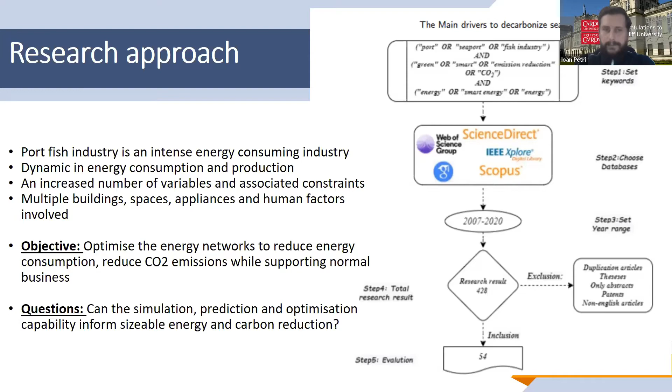Really our approach was a holistic approach, looking at the building level, the site level, and the appliance level. On the right side you can see a diagram that reflects the methodology we've adopted for developing this science-supported methodology, really from the thermal model definitions, a co-simulation environment, and what-if scenarios, and different control algorithms that we've implemented.

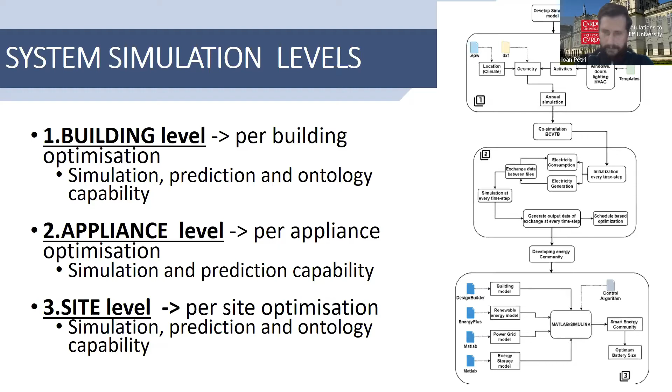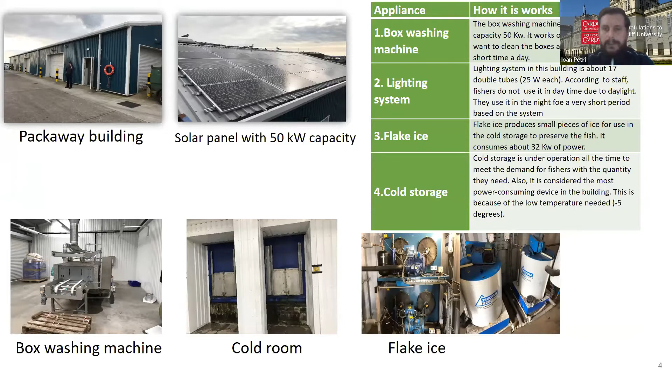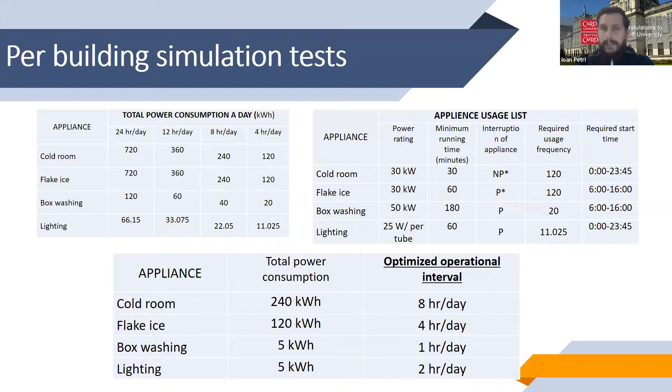From a perspective of a site and a building, we have different appliances, and we managed to collect different requirements as part of our requirements elicitation process, where questionnaires and interviews were utilized as a method to extract knowledge and information about the pilot project. We implemented preliminary tests to look at different operating schedules and their associated impact on energy consumption, while taking into account constraints such as power rating, minimum running time, interruption of appliance, and required usage frequency for different appliances.

On a cluster level, on a site level, we've looked to find ways of achieving impact, with the observation that impacts have different granularity when discussing an appliance, for instance, or a building and site level, where decisions can have different value in terms of costs and energy consumption.

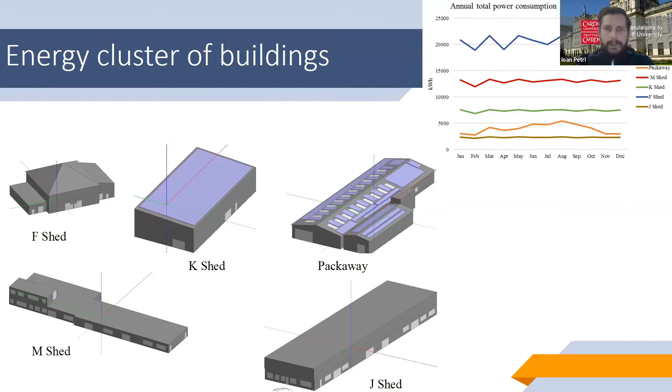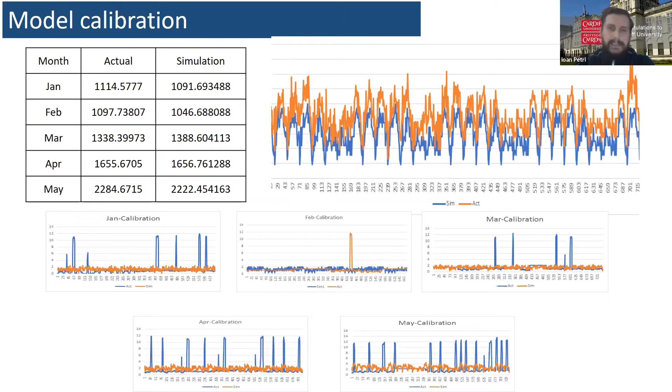This was extremely useful, because after we have a digital replica, we can test different scenarios which in practice we couldn't test due to restrictions that exist in the sites.

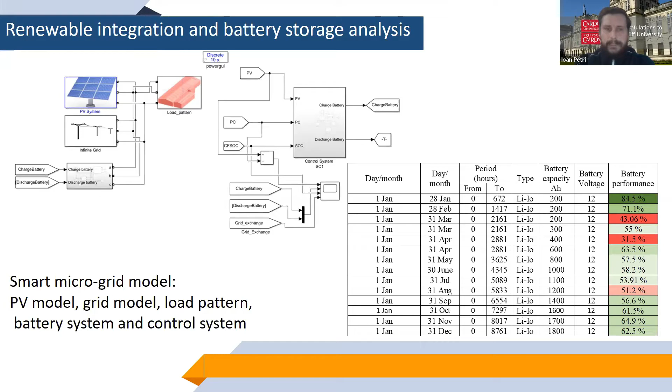Here we report a renewable integration and battery capability that we've developed through the simulation capability, where different types of battery performances have been tested with different input parameters such as capacity, voltage, type, and hours, with a view to develop this smart microgrid model that takes into consideration production units but also consumption units that may exist at the level of a fishery site.

Nevertheless, to integrate all these elements which have a certain complexity in the modeling, we utilized ontologies as a means to represent knowledge for different appliances and buildings, and to determine possible impacts and correlations between different variables and components that may exist in a site.

Really with the objective to have a quite robust and flexible simulation capability that can inform the development of a prediction and also optimization in sites.

For instance, our simulation capability framework can take as inputs weather factors, production factors, consumption factors, price factors, demand and time factors, with a view to maximize or minimize certain objectives such as production, consumption, and CO2 emissions, while instrumenting different values for the schedules and the set points at the level of appliance.

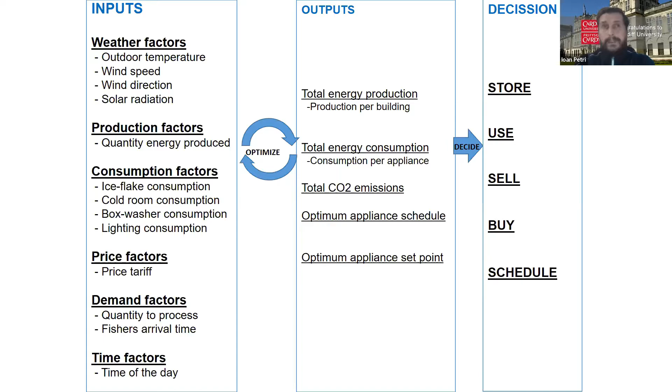Such simulation capability would give decision makers the ability to take informed decisions when to store, use, sell, buy, or schedule energy based on different events or constraints that may appear.

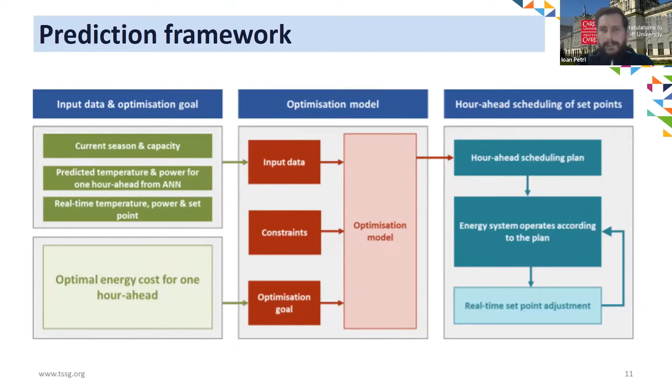A simulation-informed prediction framework has also been developed, where different input data such as season, capacity, predicted temperature, and power have been utilized with a view to enable forecasting of future scenarios. The input layer was primarily modeled around variables such as power, temperature, set point, capacity, and season, and the output layer, the result that provides future projections, is around temperature and power.

The objective was to have a workflow supported by science and evidence aggregated from the literature, but also from the very detailed requirements elicitation phase that we conducted in the trial sites, to understand what can happen in future in terms of energy consumption and demand, and more importantly, to enable decision-making and actionable insights at the port level.

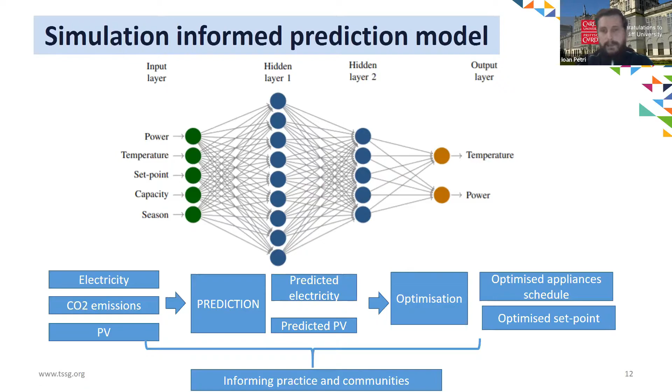In this context of informing practice, informing our industrial partners, and also providing a higher order of information for communities and stakeholders, we explain how different prediction models have been tested.

They provide different efficiencies, and we've chosen the best prediction, which is an artificial neural network that resulted after model benchmarking, giving a forecasting of energy and temperature for 30 minutes and 1 hour ahead.

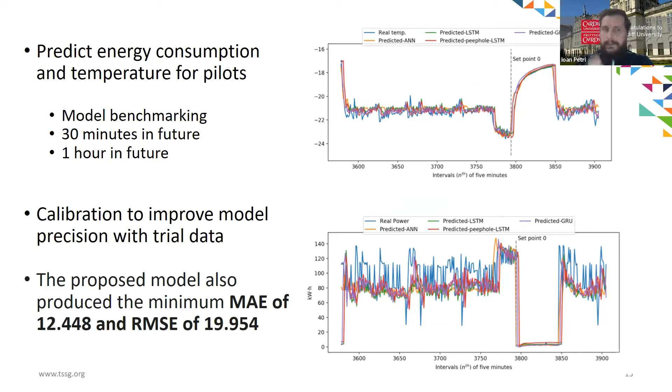Now, an element that is also present and was the result of our work is exploring this transition to sharing economies and energy communities.

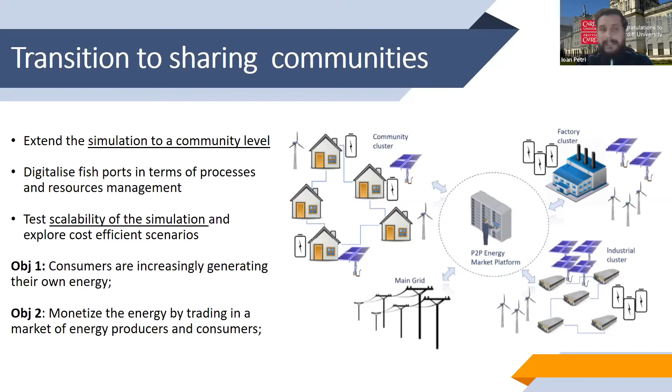Our simulation capability was scalable to a community level and enabled methods for digitalizing ports in terms of processes and resources, and also a higher grade of scalability to cover more efficient cost scenarios, where objective one was for consumers to have the ability to increasingly generate their own energy and monetize it by trading in a market of options among producers and consumers.

I will very quickly report on, for instance, this idea of peer-to-peer clusters that we've started to develop based on a lower granularity.

For instance, we started with the trial projects that were present in the project, but we expanded to a community layer where we managed to test around 1,000 participants, communities formed of producers, energy producers, and consumers that are organized in clusters.

I will convey the conclusions, saying that the simulation container and the simulation capability that we developed was meant to deliver real-time user-oriented decision support by also enabling adaptive appliance actuation based on generation and demand, cost analysis and optimization forecasting, with objectives in relation to environmental impact and modeling, where prediction was directly correlated with reaction triggers at the appliance level and remote actuation.

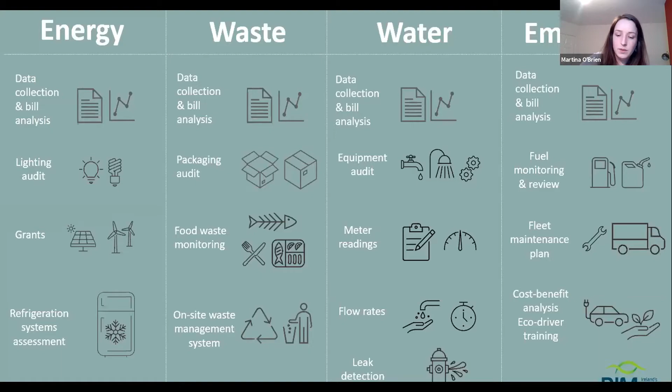Just moved on. So the most important thing about the Green Seafood Business Programme is that it's not a static programme, it's dynamic. And again, this is where the piSCES project fits in, in that it contributes substantially to how the programme will operate with companies going forward.

So now that we know the benefits of these types of projects, and the novel technology that's involved, and the way that the energy industry is heading - the paradigm shift from a centralized system to a decentralized system, where companies can really take ownership of their energy use and potential production through renewable energies - I think this is where there's real value in Irish companies participating in programs like this, so that it can feed back into these kind of on-the-ground programs.

So two companies that participated in the trial, acting as trial sites in Ireland, were the Atlantic Dawn Group - Arctic and Polar Ice - and Castletownbere Co-op. And it's companies like these participating in programs and projects like this that really allows BIM and our industry as a whole to benefit.

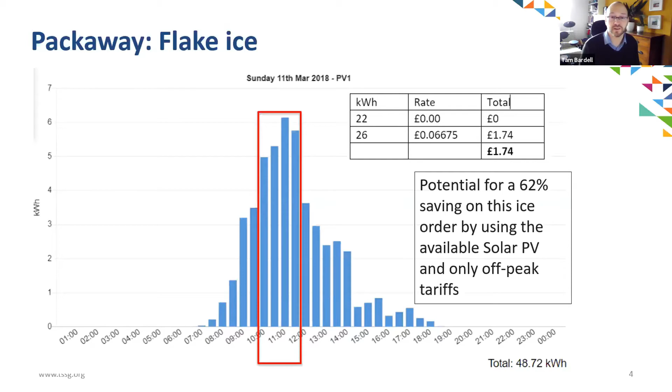The other bit of that table is showing that if we'd made half of the ice with the solar and the other half on a nighttime rate, the total cost to make that same amount of ice would have been £1.74. So £4.60 versus £1.74 shows a potential of 60-odd % saving on the ice order by using available solar PV and only off-peak tariffs. So piSCES really woke us up to the opportunity to save a significant amount of energy for our ice making.

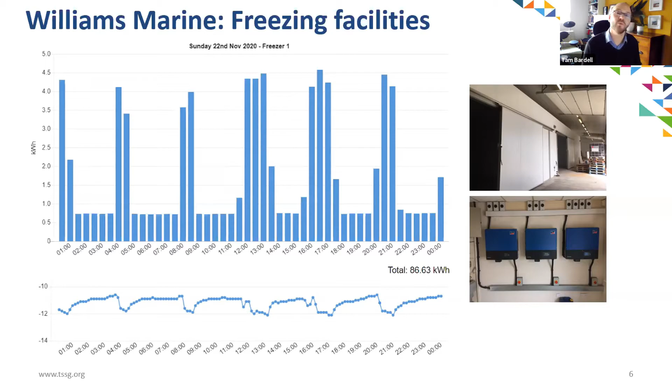If you look at the chart on this slide, it's zooming in on one of the freezers and showing you the energy footprint of it. So you can see the compressors come on every 4 hours or so to keep the temperature about -11 degrees. So there's a good opportunity there to either reduce the temperature in the freezer or have a bigger band of temperatures that you're working within and operate the freezers differently.

So if I go into the next slide, the green line on this slide is showing the total energy which is being pulled from the grid in a day in November this year. And you can see that there's quite a heavy base load on the site, quite a lot of power being consumed from the grid. The blue line is showing the solar generation on that day.

Obviously not a massive amount of solar on a November day in Milford Haven. But what this is showing is that actually all of the solar is being used on the site when it's being generated. Now you can have a look at a summer's day, and I've done that, and you can see that obviously there's more solar being generated, but there's always this quite heavy base load because they've got a lot of pumps running, they've got freezers running. Most of the time the solar will be mopped up by the base load in the site.

So the optimization here is to operate the freezers differently based on a half-hourly energy tariff, and that'll be the recommendation to Williams Marine.

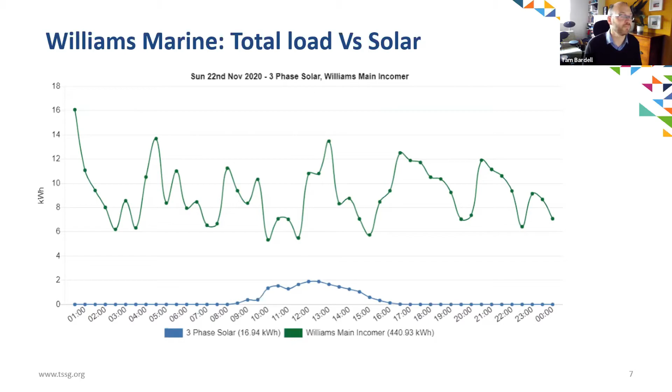So going on to smart energy clustering. The piSCES actually stands for Smart Cluster Energy System. The idea being that once you've cut the energy overheads for individual sites, as I've been describing, then you bring sites together into an energy cluster to allow them to sort of trade any spare energy that they're generating between them. So Williams Marine is a good example of that.

You can see that they're using all of the solar on the site. If there was more solar available through a cluster model, then they'd be able to use that as well to offset their bills. So we started to investigate this in 2018.

We looked around to see if anybody else was doing this sort of thing, and came across an example in North Wales and Bethesda, where the National Trust have a hydro on the side of the hill, and they were selling their power directly to homeowners in Bethesda.

So we started speaking to an energy charity called Energy Local, who'd implemented this way of sharing energy through a contractual relationship with the energy supplier. That really shakes things up, so we decided to work with them to set up the UK's first commercial smart energy cluster. And that's what we've done.

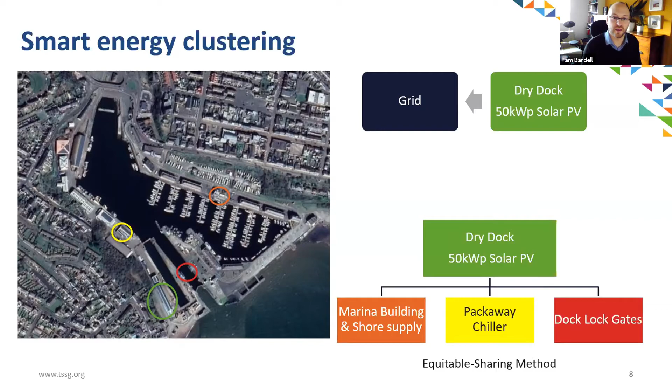This slide shows we've got a site called the Dry Dock, which has a 50 kilowatt solar system on the roof. It doesn't have any load in the building, it's just an open-sided storage shed, so it's always just putting all of its power onto the grid. What we've managed to do is use that site, through a contractual relationship, to offset the bills on a number of sites within the local area through this equitable sharing method. Within any half-hour period that the solar is generating, that power will be used to offset the bills on those sites equally if they're consuming power at the same time.

To explain a bit more about the smart energy clustering, the top left of the slide shows what we've been doing: exporting to grid and being paid 5 pence per kilowatt hour. Our income in 2019 from that was about £2,000. But of course, these other sites around and lots of our other properties are buying that same power back from the grid, paying 14.5 pence per kilowatt hour. So there's got to be a better way than that, and that's what piSCES is all about.

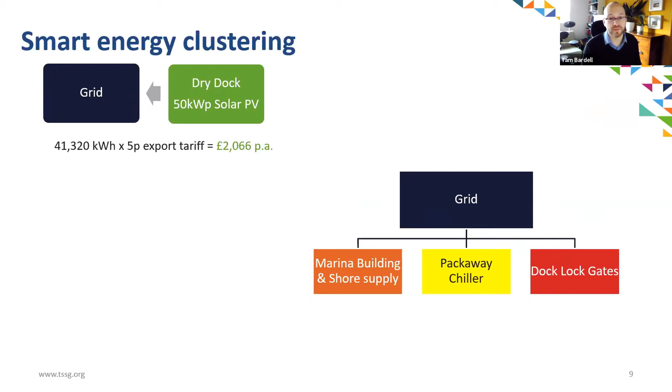What we've managed to set up in Milford Fish Docks is this smart energy cluster, whereby we're selling the solar power to ourselves. So you've got two income streams now. You're still exporting a little bit to the grid, we're estimated to export £340 a year to the grid. But the rest of that money we would have been getting through the export tariff, we're getting back through solar sales to ourselves.

We're selling the power to ourselves at 5 pence per kilowatt hour and making an income, or you could see it as a saving, whichever way you want to see it. But if you explain it as income, then what we've also got is a cost saving, because we're not buying that power at 14.5 pence, we're buying it now at 5 pence. So we've got a significant saving. We've still got the same income from the solar system, exporting to grid and selling to ourselves, but we're also now saving a significant amount on our bill.

That's proven to be a really great way for us to save money on top of what I explained with the flake ice operations. It's something we're looking to expand across sites going forward. We expect to expand what we've started in Milford Haven, and ideally, if we can, also set up another smart energy cluster across the water in Pembroke Port to save even more money. So thanks very much, that's my presentation.

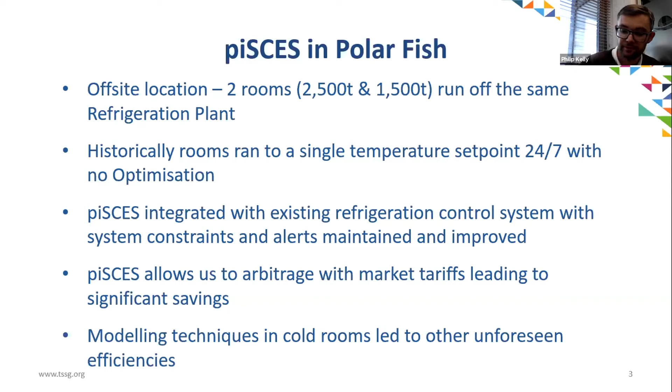Within the main site, it was the ice plant that was chosen for the piSCES project. This was because it could serve as a standalone project and wouldn't impact on any of the processing or freezing facilities on site. The ice plant is involved in making flake and slush ice that's used for our tankers to bring fish up from the boats at the pier.

Historically, much like Polar, not much attention was paid to the ice plant. It was switched on and off manually for an estimated amount of time whenever somebody needed ice for either bins or for one of the trucks. What we found through testing with piSCES initially is we were better able to establish how long it takes for us to make 1 tonne of ice, and that alone has resulted in a saving.

The way piSCES has been working with the ice plant, it accepts a daily ice order remotely and can automatically actuate the plant at the most economic time. So if we decide we want 10 tonnes of ice for 8 o'clock the next morning, rather than switching on the ice plant overnight or for the full day before and paying no attention to electricity rates, piSCES can plot the most economic times to make the ice for us. This gives us greater flexibility in how we run the ice plant.

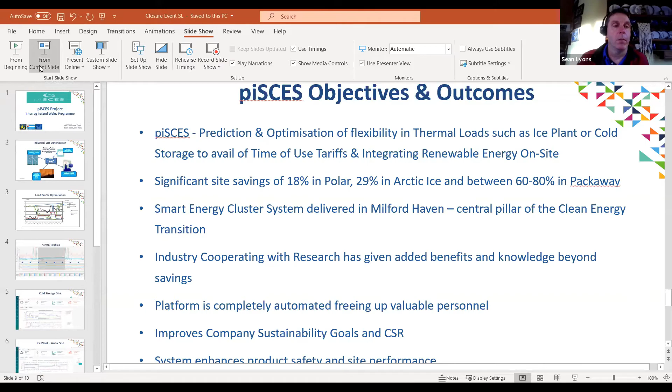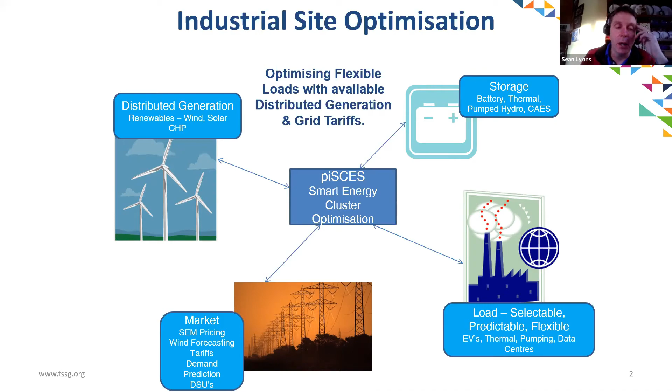Okay, so what I'll do then, guys, is I'll try and build on the previous presentations and pull it together into how the platform looks and how it operates. So this is where I finished at the introduction stage. That was basically just, you know, what is piSCES?

A site like Polar and Arctic are on the half hour, so there's basically 48 opportunities every day to optimize that. Other sites like Castletownbere and, as Tam mentioned, Milford Haven are on a tariff, with a night tariff of maybe 6 cents, a day tariff of around 8 or 9 cents, and then a peak tariff of around 14 cents. So we've sites both on tariffs and on the wholesale rate.

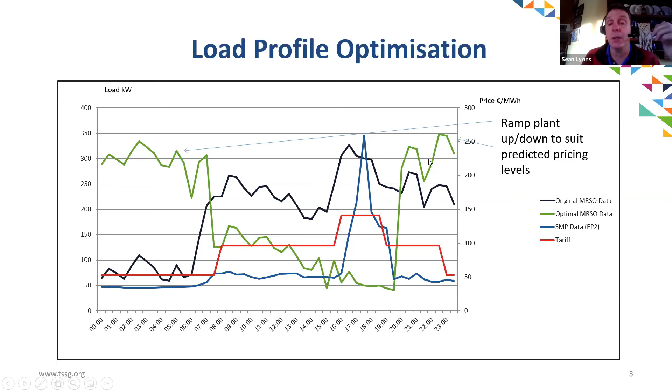Basically, our piSCES system would have ramped up and down that flexible load, such that they were very busy during the night, and during the day obviously we were just maintaining as little as possible. Again, we would ramp up when the price went down again. So there's significant savings as we've seen for that.

We set the minimum temperatures at minus 18 and more recently at minus 19 degrees C, and we also go up to minus 25 degrees C. So we integrated directly with the refrigeration control system, and we put a lot of monitoring equipment into the rooms to make sure the temperature spread was good and we weren't getting any warm spots, and we averaged those temperatures in the rooms to give us the temperature.

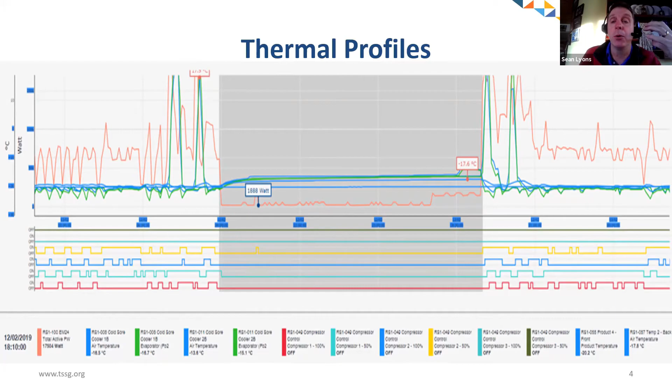By doing lots and lots of trials of ramping up and ramping that down, we were able to build a prediction model of how that room reacts. Obviously there were other factors like ambient temperature and how full the rooms were, and the amount of traffic going in and out of them. So we had to have different thermal profiles and prediction models for all the different criteria.

So what we did is we have 3 set points now. You can set it to minus 25, minus 22 in the middle, or you can actually switch it off. When we switch it off, we still keep the fans and everything running to make sure there's good airflow around the product. Then the prediction model predicts what that temperature is going to be every hour, and it reruns the algorithm every hour to make sure it's staying in line.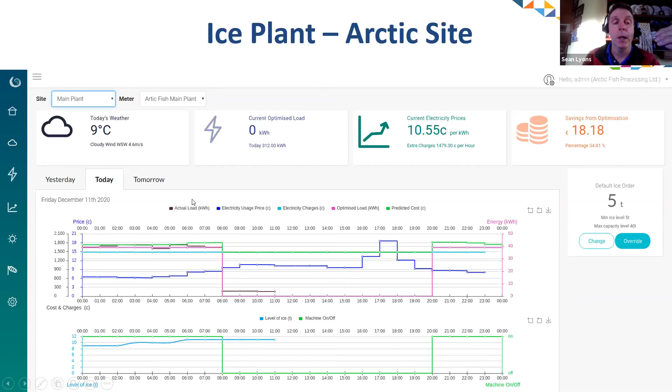This, obviously, it would have made ice between midnight and 8 a.m. It would have switched off all day to miss the high prices, and it would come on again at 8 p.m. and finish off the ice order before midnight. And you can go into tomorrow and look at what's happening there. It does it at the most economic time.

Building on what Tam mentioned, similar type of system for their ice plant. It was much more complicated for us because there was no control system for it — it was completely manual, so we had to put in a smart relay that the piSCES system could talk directly to. So again, the operators can put in an ice request for 8 a.m. tomorrow morning, and it will make it at the most opportune time.

As you see in Milford Haven, they're not on the half hourly; they're on a night rate and a day rate. And also in Milford Haven, we have solar on the roof, so our solar prediction model predicts how much solar we're going to have in the coming period based on weather forecasting and a lot of other items. So we're trying to maximize using the solar. Previously, as Tam mentioned, that solar was being spilled onto the grid, so it's almost free energy to them.

So basically, you optimize that. The ice machines turn on and off to make the required amount of ice for the required time at the cheapest to avail of market prices and solar energy.

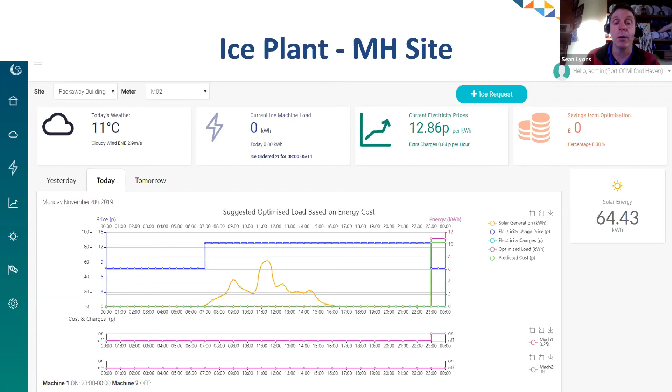That's the arbitrage we speak about. So to pull this together and link it to the objectives we had at the beginning of the project, the piSCES platform is a prediction and optimization system, leveraging the flexibility in thermal loads such as ice plants and cold storage to avail of time-of-use tariffs and integrate renewable energy on site.